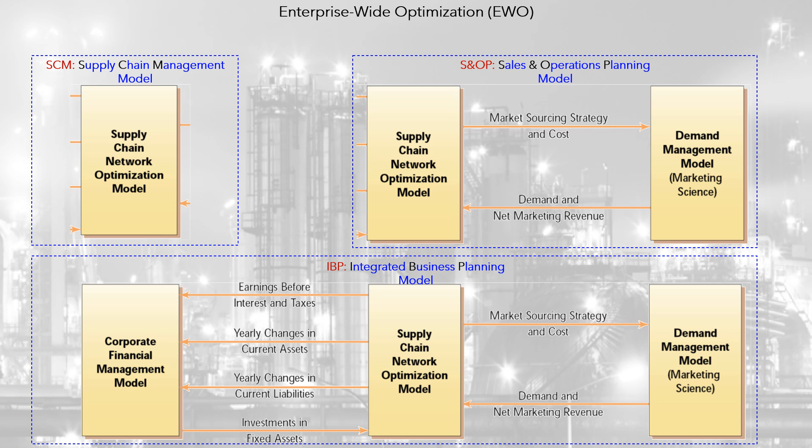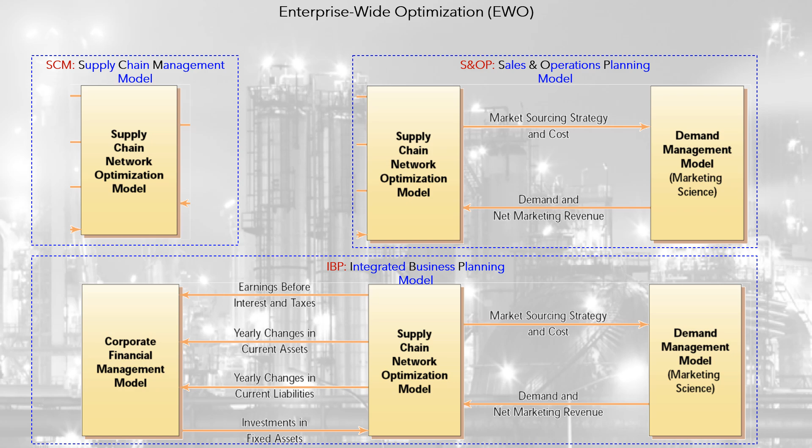In the paper 'Enterprise Profit Optimization, EPO, the Next Wave in Value Creation,' Robert Phillips from Manugistics said: integrating pricing actions and supply chain actions, EPO provides companies with the tools required to quickly and effectively achieve real optimization goals.

Until the advent of Industry 4.0, S&OP modeling was concentrated on production modeling, considering as exogenous parameters the results of models for sales and maintenance. The financial results were obtained from post-processing, in some cases in Excel books.

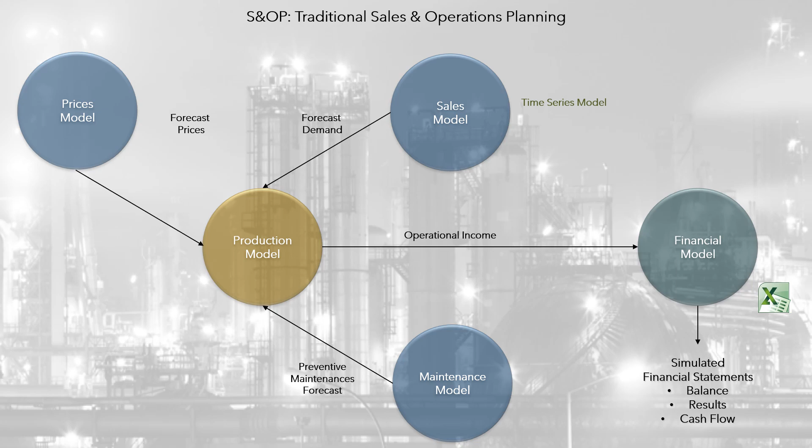In the era of Industry 4.0, S&OP may be constructed based on 8 groups of solutions or systems: production, energy, maintenance, distribution, sourcing, human resources, financial, and sales and marketing.

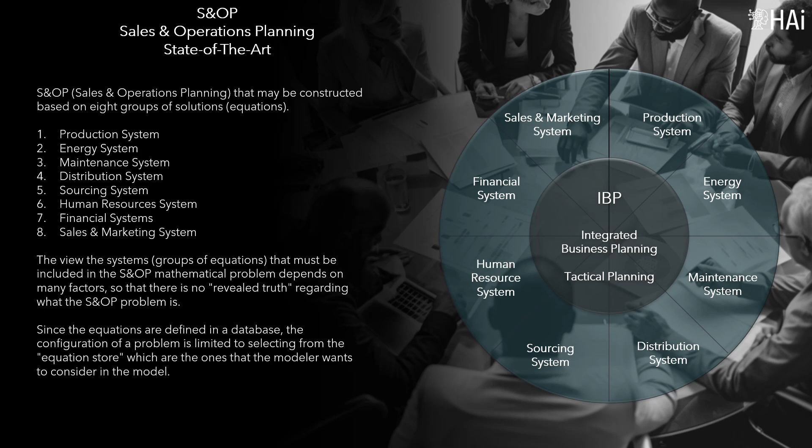HAi views these systems as groups of equations that must be included in the S&OP mathematical problem. Which ones depend on many factors, so there is no revealed truth regarding what the S&OP problem is. Since the equations are defined in a database, configuring a problem is limited to selecting from the equation store which ones the modeler wants to consider in the model.

This evolution gives rise to enterprise-wide optimization. Enterprise-wide optimization, the comprehensive and complete view of the value chain, improves competitive advantage, reduces costs and increases profits.

Therefore, managers seek to comprehensively optimize the planning and scheduling activities of their value chain, which was originally understood as the coordinated sum of supply chain management, SCM, and demand chain management. Today, enterprise-wide optimization has expanded and covers all functional areas of the organization, including financial and human resources chains.

There are three dimensions to the optimal synchronization of a supply chain: functional, associated with the purchase, manufacture, transport and storage of industrial inputs and products; spatial, associated with activities through industrial facilities and different forms of markets; and hierarchical, associated with the impact of decisions at the strategic, tactical, operational and business levels.

Enterprise integration makes SCM one of the components of a broader view of integrated planning. They respond to the purposes of strategic and tactical planning within the organization.

Hierarchical coordination of planning tools. It is traditional to organize decisions hierarchically into strategic, tactical and operational. The operational decisions are divided into scheduling and advanced optimal control.

However, due to the technological progress generated by Industry 4.0, mainly in relation to smart metering systems, nowadays we can talk about a new type of online optimization modeling: real-time distributed optimization.

From the point of view of mathematical modeling, hierarchical levels are intertwined and coordinated through the boundary conditions in time, and common modeling that can be shared.

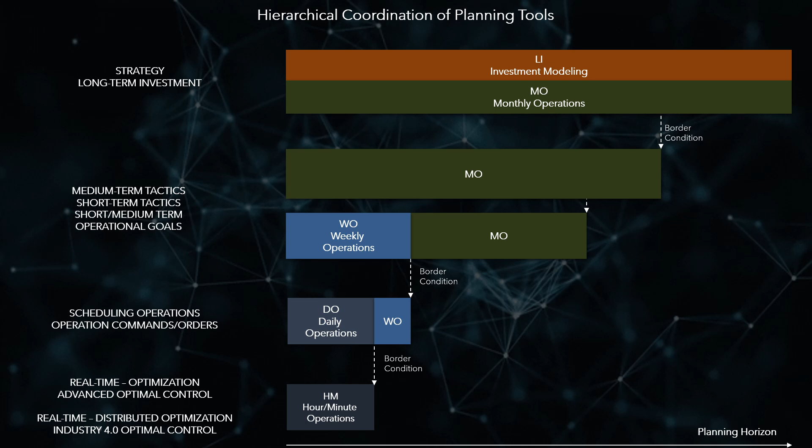The modeling strategy of HAi is that all models of a decision support system can communicate with each other. Under the principle of transitivity of algebraic formulations, models grow in complexity as they descend from the hierarchy of decisions.

All models share equations, mainly those related to the physical process. Therefore, they can be made in a continuous modeling process.

The models of higher hierarchy will be more aggregated, in order to cover long periods of analysis, of the order of years. The emphasis of the model should include the interpretation of the economic and technological future, so it is appropriate that they are stochastic optimized.

As the models approach real time, the level of detail increases, and the planning period decreases, the most important being the engineering representation of the process.

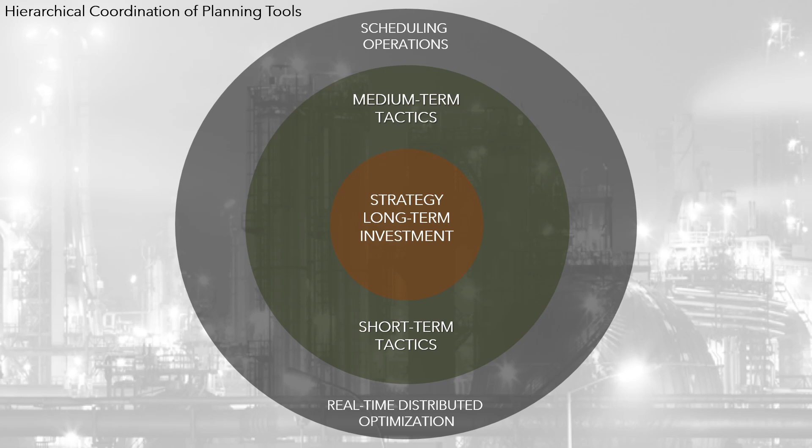Spatial coordination is related to activities through industrial facilities in various regions and different forms of markets.

The decision support systems, DSS, were conceptualized as a set of mathematical models that exchange information between them, working offline.

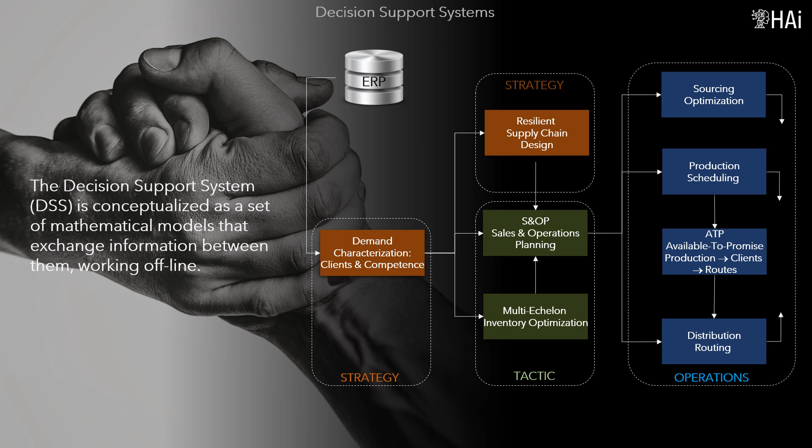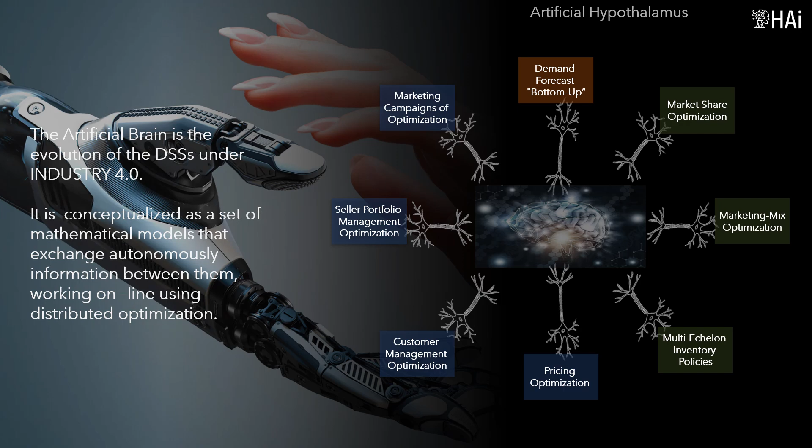The artificial brains is the evolution of DSS under the Industry 4.0 revolution, conceptualized as a set of mathematical models that exchange autonomously information between them, working online, using distributed optimization.

HAI-OIL EWO meets all the software solutions developed by HAI, in different areas of application of mathematical optimization models, oriented to planning and to scheduling operations, in different business of the petroleum products supply chain.

To ensure optimal decision-making at the level of strategy and tactics, the system must be considered, synchronizing the different links in the chain, in space, function, and time.

The management of the complete oil supply chain must be based on the integrated optimization of the different links. It is one of the main research topics worldwide, due to the importance and impact of the products it handles.

The support of this type of planning is complex, and therefore turns out to be a perfect field for the application of optimization tools, mathematical programming, in order to support decisions that allow the optimal coordination of the holistic supply chain.

Oil enterprise-wide optimization integrates mathematical models for each of the links in the oil supply chain, in such a way to manage the planning of the supply chain with a holistic vision.

The design of HAI-OIL EWO was the result of work done for a multi-business oil company. The union of models, and their coordination, forms the hypothalamus of an oil enterprise.

The current computational power allows to model in detail the supply chain, considering individually all the systems that compose it. This allows to visualize all the existing bottlenecks, and those that affect the maximization of economic gains.

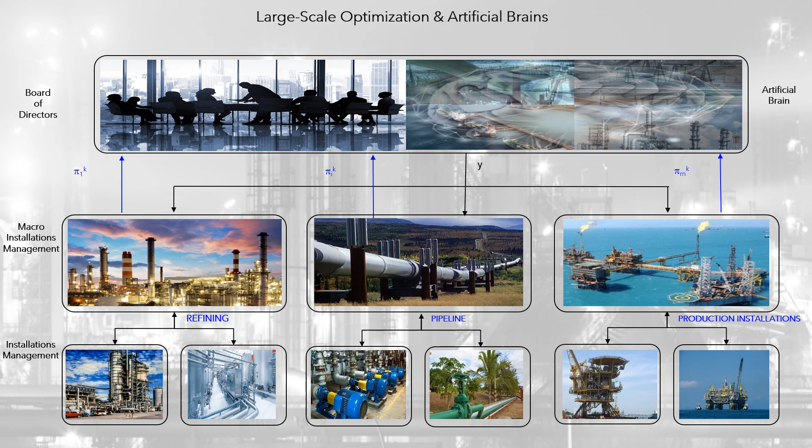One of the fundamental ideas of the artificial brain is the atomization of the system, a bottom-up approach, to integrate multiple mathematical models, using the framework of large-scale optimization methodologies, like multi-level Benders theory, and Lagrangian relaxation.

Given the complexity of the real world, which involves mathematical models of all types, linear, nonlinear, discrete, continuous, convex, non-convex, etc., it cannot be thought that with a single methodology, all the problems that make up an artificial brain can be solved.

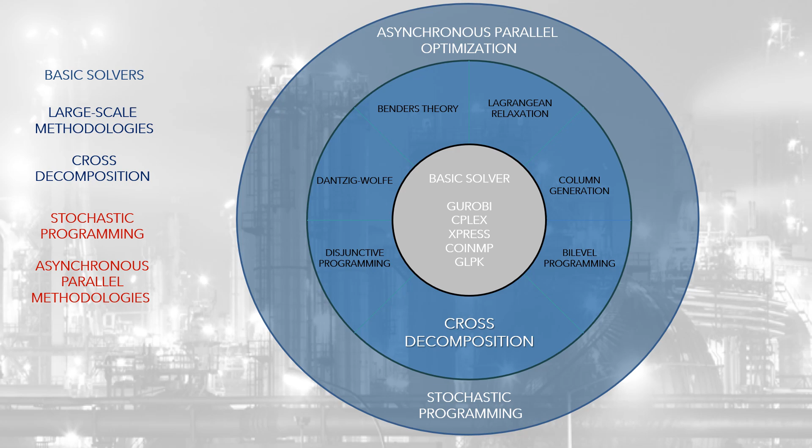Therefore, it is required to have access to multiple large-scale optimization methodologies, which, using the principles of cross-decomposition, connect all mathematical problems, to perform autonomous distributed optimization in real time.

Oil and gas optimization solutions. Below are several optimization solutions, commonly applied in the oil industry. The table, elaborated by IBM, shows a resume of the optimization solutions for oil and gas enterprises.

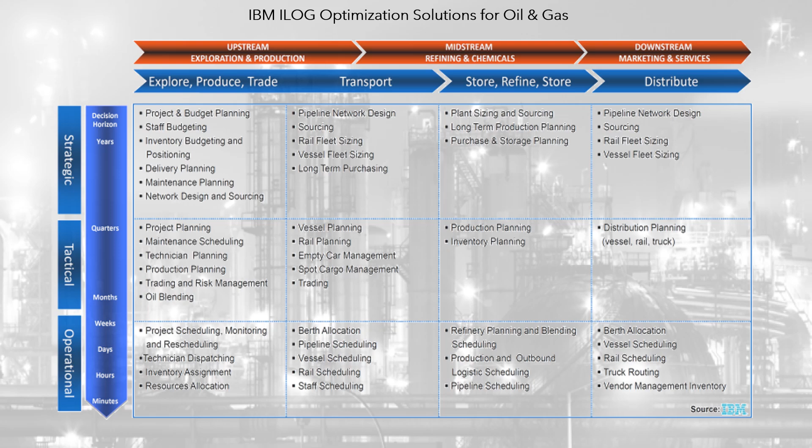The table shows detailed solutions offered by IBM for oil and gas for midstream, refining, and chemicals.

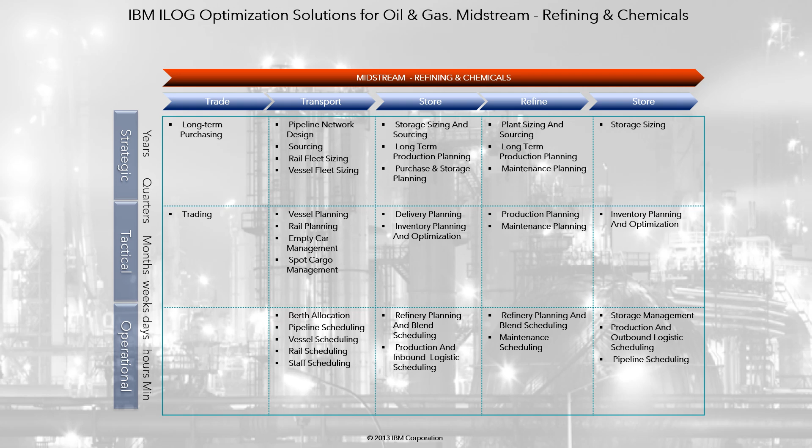HAI Oil meets all the software solutions developed by HAI, in different areas of application of mathematical optimization models, oriented to planning and to scheduling operations, in different business of the petroleum product supply chain.

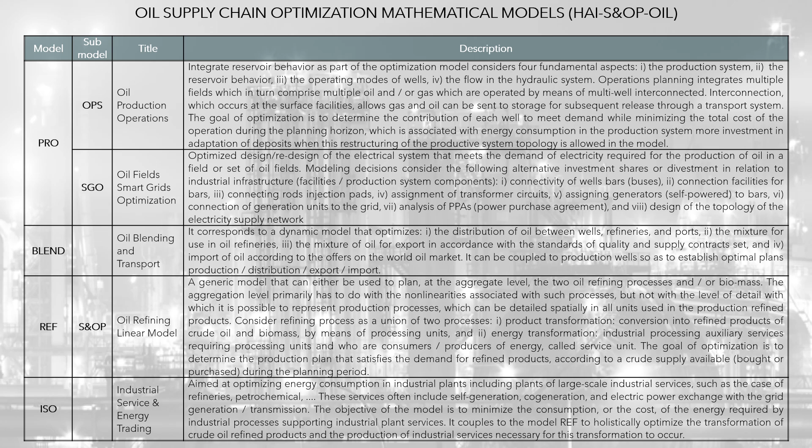The table presents a summary of the mathematical models developed by HAI, for oil supply chain optimization.

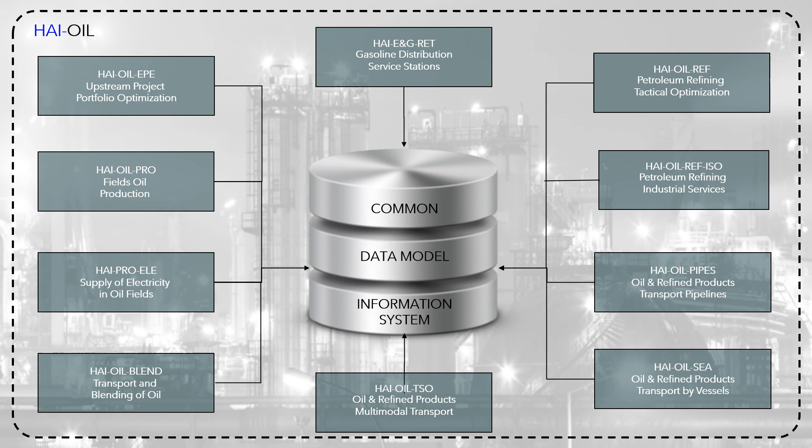All models that integrate an artificial hypothalamus must share a general data model in such a way that they are easily integrated.